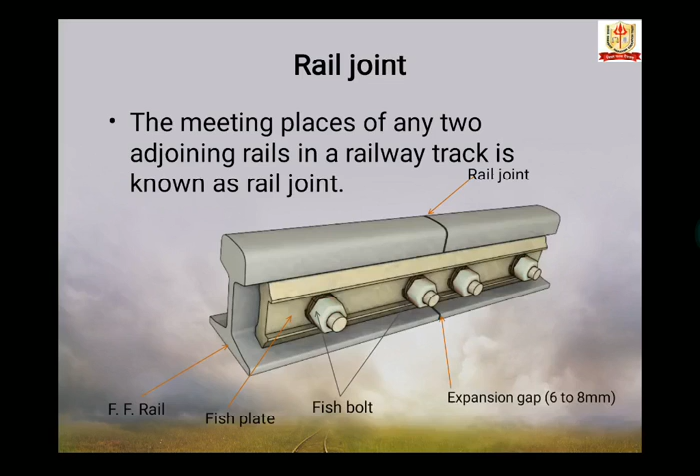Okay, so what are the requirements of a standard rail joint? The first is a perfect rail joint should be as strong and stiff as the rail section itself. Both the adjoining rails at the joints should remain true in line laterally as well as vertically when the train passes over the joint. It should provide enough expansion gap between two adjoining ends of the rail for expansion of rails due to the variation in temperature.

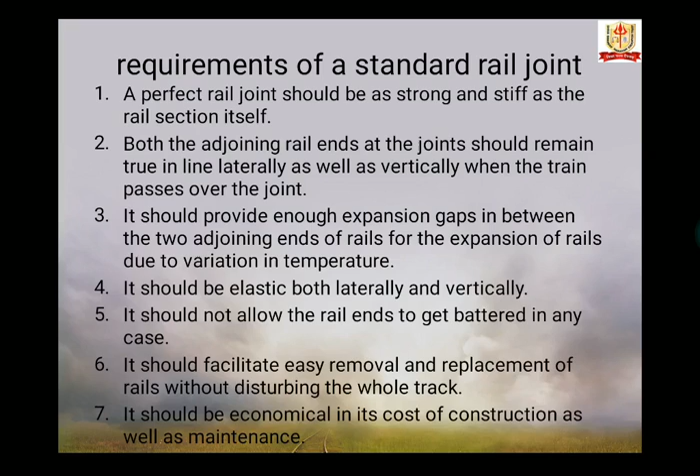It should be elastic both laterally and vertically. It should not allow the rail ends to get battered in any case, otherwise the rail cracks. It should facilitate easy removal and replacement of rails without disturbing the whole track. It should be economical in its cost of construction as well as maintenance. These are the requirements. Now we start the types of rail joint.

First is supported rail joint. When the rail ends rest on a single sleeper called a joint sleeper, it is termed a supported joint. Such rail joints were first constructed by placing three wooden sleepers abutting against each other under the opposite rail joints.

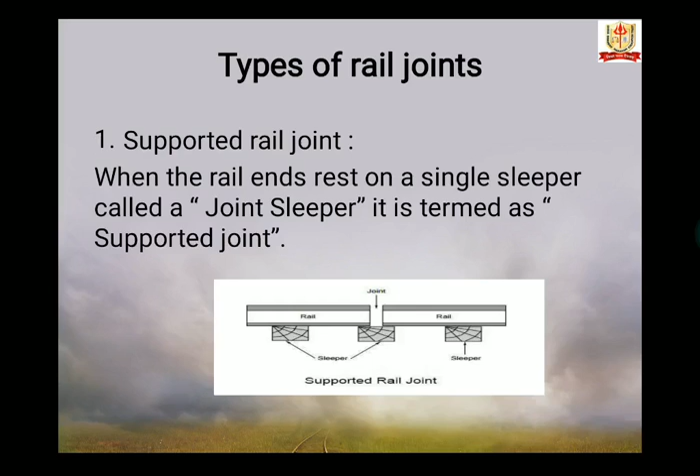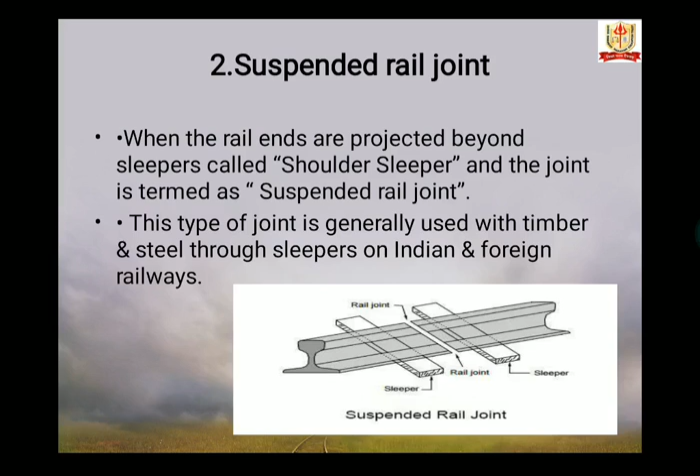Suspended rail joint: when the rail ends are projected beyond the sleeper, called a shoulder sleeper, the joint is termed a suspended rail joint. This type of joint is generally used with timber and steel trough sleepers on Indian and foreign railways.

Next is bridge joint. When the rail ends are projected beyond the sleeper as in the case of the suspended joint and they are connected by a flat or corrugated plate, this plate is called a bridge plate and it is termed a bridge joint. This type of joint is not used on the Indian railway.

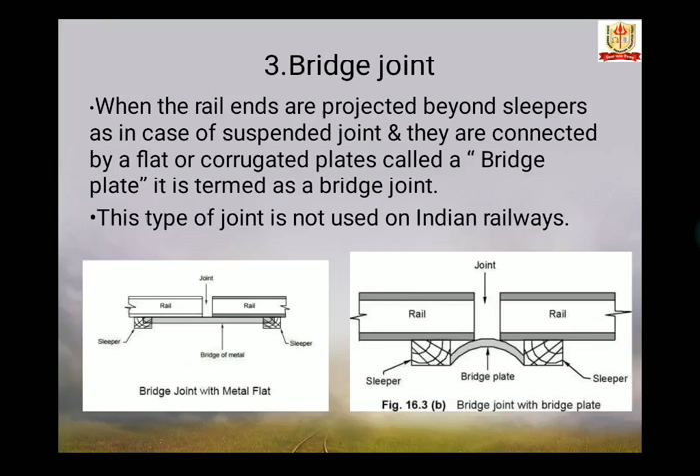Welded joint. These are the best joints as they fulfill nearly all the requirements of the ideal or perfect joints. The rail joints in which both the adjoining ends of the rails are welded together by a suitable type of welding are termed welded rail joints.

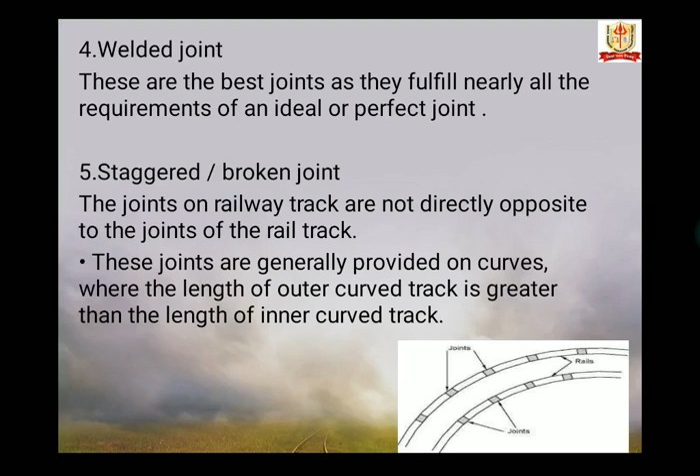Next is staggered or broken joint. The joints on one rail track are not directly opposite to the joints of the other rail track. When the joints in one rail are not exactly opposite the parallel rail, it is known as staggered joints. These are generally provided on curves where the length of the outer curve track is greater than the length of the inner curve track.

Next is square or even joint. The joints of one rail track are directly opposite to the joints of the other rail track. This type is generally used on straight track.

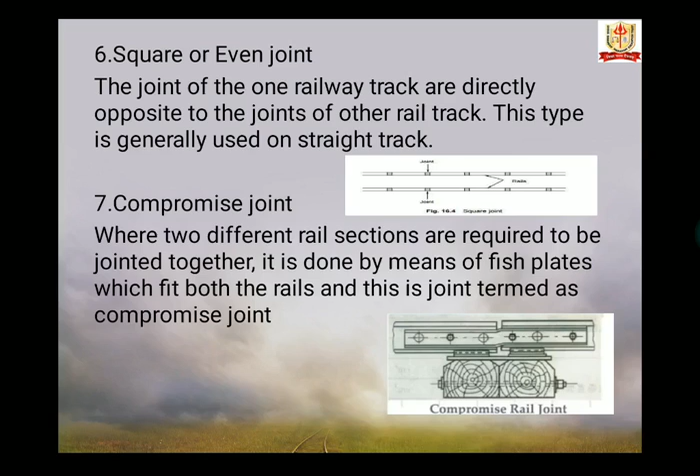Compromise joint: where two different rail sections are to be jointed together, it is done by means of fish plates which fit both the rails, and this joint is termed a compromise joint.

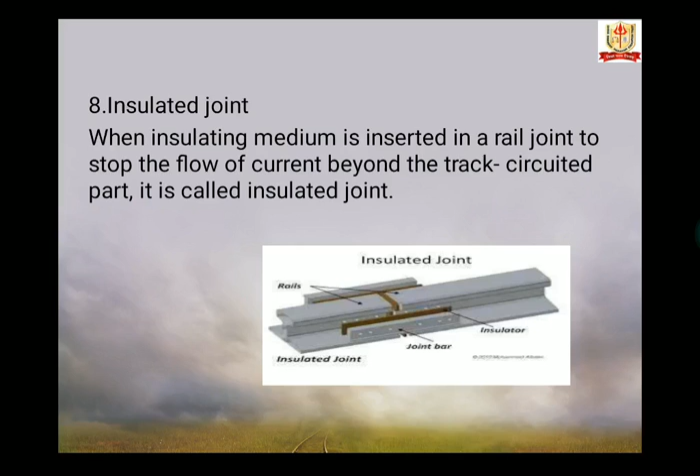The last type of rail joint is insulated joint. When an insulating medium is inserted in the rail joint to stop the flow of current beyond the track circuit part, it is called an insulated joint. It is used in a track beyond the station yard limits on either side of a railway station.

Next important topic is creep of rail. What is a creep? Creep is defined as the longitudinal movement of rail with respect to sleeper in a track. So what is the definition of creep of rail? The longitudinal movement of rail in a track is known as creep of rail. It occurs in almost all railway tracks but varies in magnitude considerably.

In some locations, the creep may be several centimeters in a month, while in other locations, it may be negligible in that period. It is observed that rails have a tendency to move gradually in the direction of traffic.

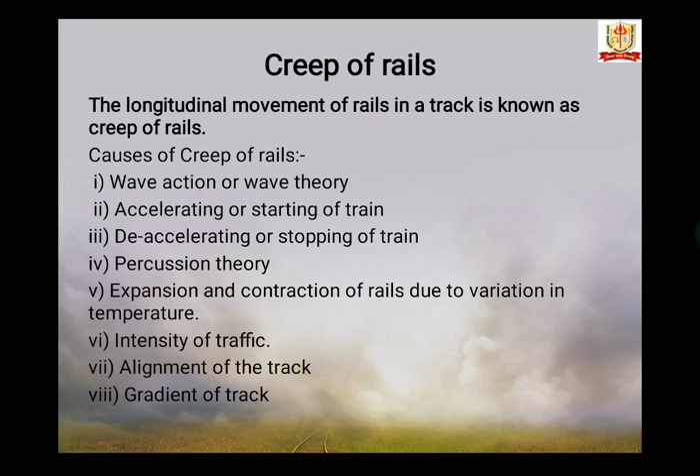Now, the causes of creep of rail. First cause is wave action and wave theory. Next is accelerating or starting of train. Next is decelerating or stopping train. Next is percussion theory. Next is expansion and contraction of rail due to variation in temperature. Next is intensity of traffic. Next is alignment of track. And last is gradient of track. These are the causes of creep.

Effects of creep of rail. Sleepers move out of position, affecting the gauge and alignment. The rail joints are jammed and prevent expansion. Operation of switches becomes difficult. The surface of the track is disturbed, resulting in uncomfortable riding.

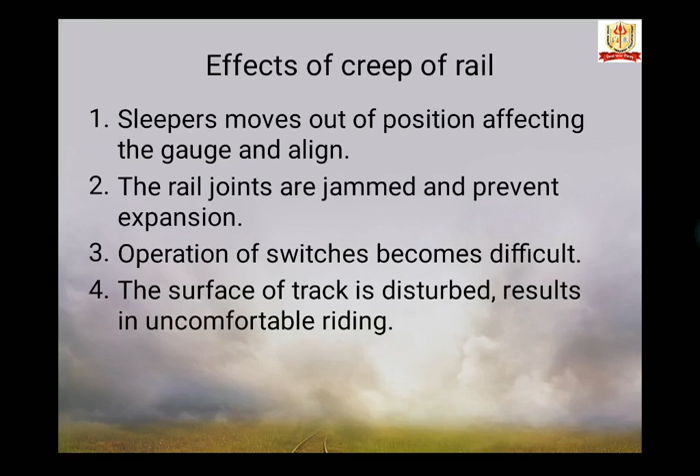Points and crossings get distorted, and it becomes very difficult to keep them to correct gauge and alignment. Okay, so it also becomes difficult to operate the switches. These are the effects of the creep.

Now we start the causes of creep. First cause is wave action or wave theory. Wave motion is set up in resilient track by the moving wheel loads. The train wheels cause depression under themselves, forming a lift or crest immediately at the rear and front of the wheel.

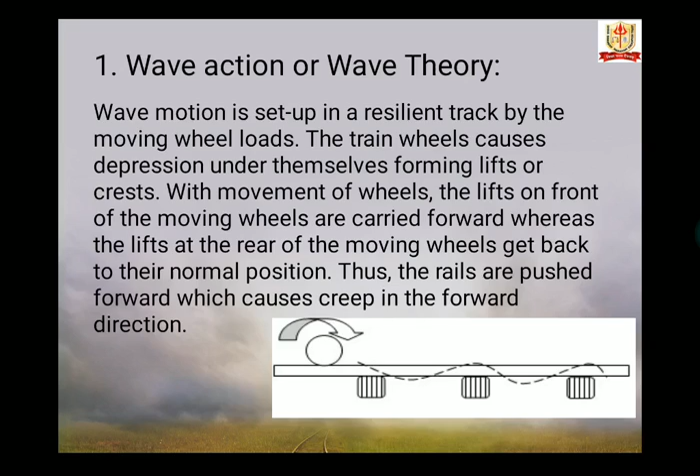With the movement of wheels, the lifts in front of the moving wheels are carried forward, whereas the lifts at the rear of the moving wheels get back to their normal position. Thus, the rails are pushed forward, which causes creep in the forward direction. This is the wave theory. This is a diagram of wave motion theory for development of creep.

Second is percussion theory. The rail creep is due to the impact of wheels at the end of the facing rail at each fish plate joint. As shown in the figure, this is a fish plate. So, when the wheel passes over such a rail joint, the trailing rail depresses down and the wheel gives an impact to the end of the facing rail, which results in creep in the forward direction. So, here is the trailing rail, this is your facing rail and this is your fish plate.

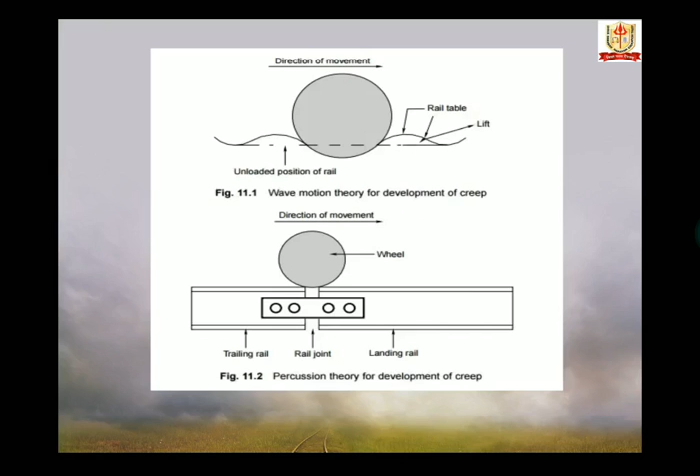So, when the wheel passes over such a rail joint, the trailing rail is depressed down and gives an impact to the end of the facing rail, which results in creep. This creep is very small in a single impact, but the cumulative effect of a number of wheels in quick succession results in sufficient creep.

Next is accelerating or starting of train. At the time of accelerating or starting of a train, the engine gives a backward thrust which tends to push the rail backward, causing creep in a backward direction. Next is decelerating or stopping the train. When the train is decelerated or stopped, the braking effect tends to push the rail forward, thus causing creep in the forward direction.

Next is expansion and contraction of rails due to variation in temperature. Creep may also be caused due to unequal expansion and contraction of rails due to variation in temperature. The creep in this case is influenced by the range of temperature variation and location of track.

Next is intensity of traffic. In a single line track, creep will result in the direction of heavy intensity of traffic. It means in a single line system, if heavy equal traffic runs in both directions, the creep is balanced. Otherwise, heavy traffic in one direction causes creep. In double line track, creep occurs in both tracks in the direction of movement of trains. In the double line system, trains on a particular line being unidirectional, creep occurs in both lines.

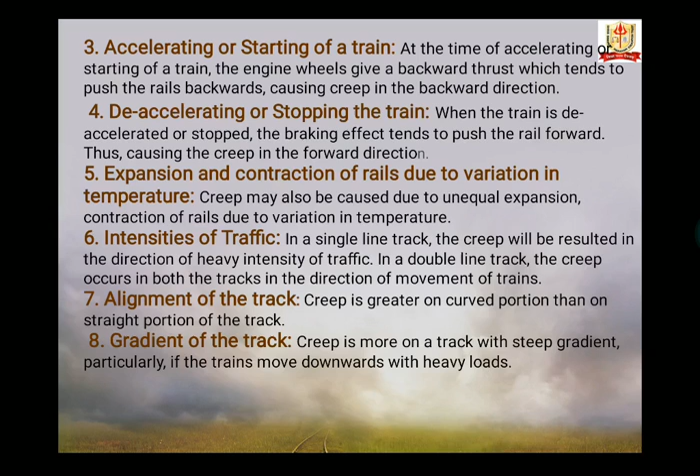Prevention of creep. The following are the measures which are commonly adopted to prevent creep. First is pulling back the rail. When the creep is clearly visible, the best remedy is to pull the rails back to their original position by means of crowbars and hooks through the fish holes.

Okay. Next is provide sufficient ballast and packing with care. Next prevention is use steel sleepers. Steel trough sleepers are best. Increase in the number of sleepers can help. Using anchors and anti-creepers: 4 anchors per rail if creep is 7.5 cm to 15 cm per month, 6 anchors per rail if the creep is 22.5 to 25 cm per month. Used at level crossings, in yards and places of heavy brake application.

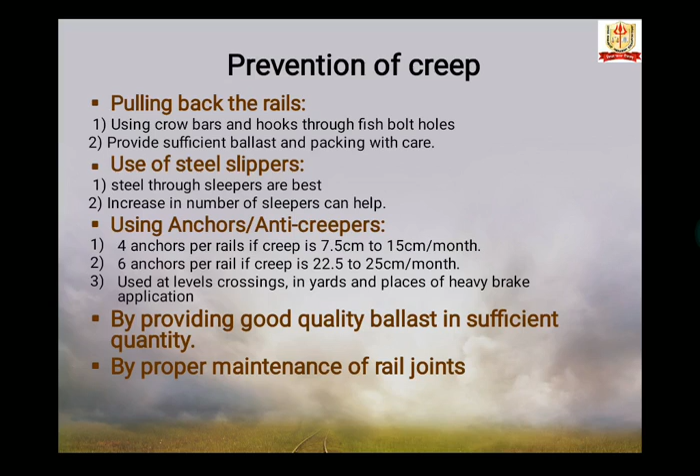By providing good quality ballast in sufficient quantity, and by proper maintenance of rail joints. These are the preventions of creep. Okay? So, here is the end of today's lecture.